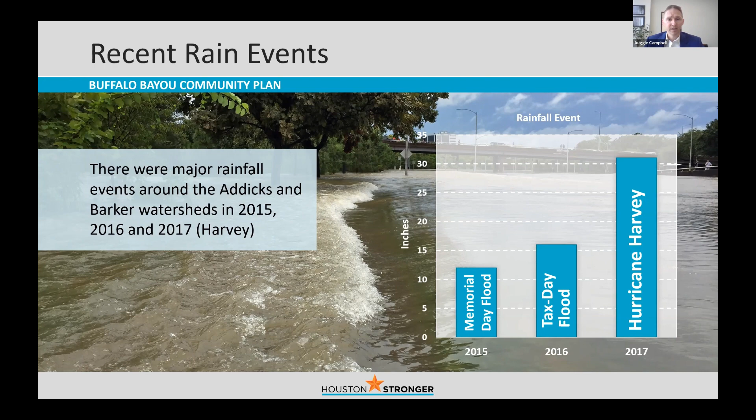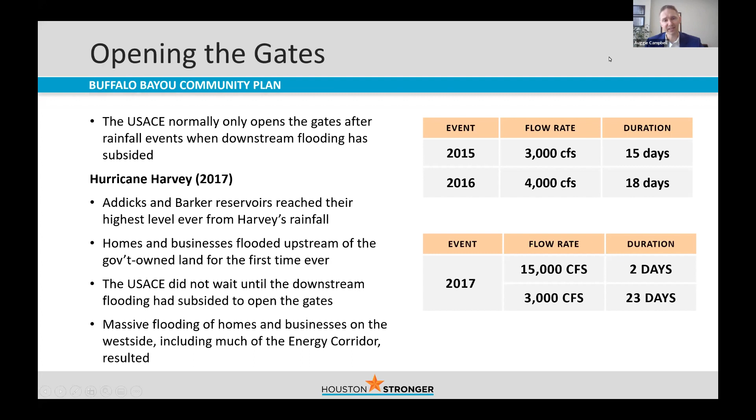If you go to the next slide, you can see just how insufficient the infrastructure that we had was, and how big of an issue flooding became. You can see the 2015 and 16 events, they were big events. They were 500-year storm events, and they were still nothing compared to Hurricane Harvey. If you go to the next slide.

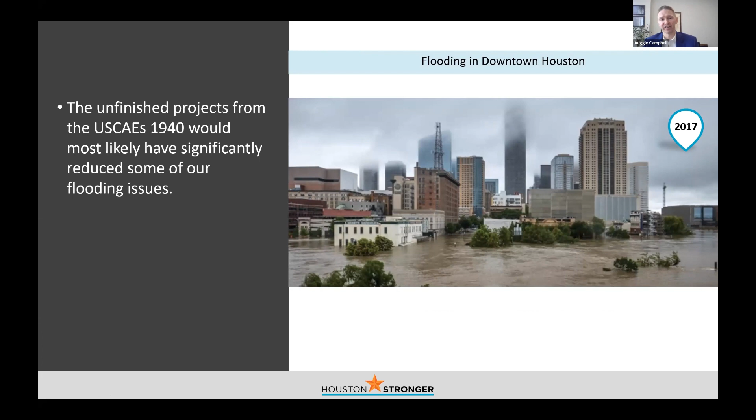Now, if we would have had that 1940 plan, what would flooding look like? That was the real challenge for Houston Stronger. We really believe that if we would have stuck to that 1940 plan and completed it, the significant flood inundation and loss of life and property damage that we suffered would have been significantly less. So if you go on to the next slide.

Again, this group really came together after Hurricane Harvey. And as Auggie just mentioned, the property tax revenues that the flood control district had been receiving were just really insufficient for a community of our size, and with the type of ongoing flooding problems that we experienced. And that's when we all said we need to do something more to keep a focus on this problem and to bring this constantly to the attention of our elected officials and other agencies that are involved with this, to keep moving forward with implementing a number of plans that have been created throughout the region and are just waiting for funding to get implemented.

And so that's what we decided to do. We needed to put a heavier emphasis on working through this tremendous backlog of projects that need to get done in order to help reduce the potential for flooding in this region. And we're very proud of the number of different types of organizations that are members and are willing to help us work on this issue.

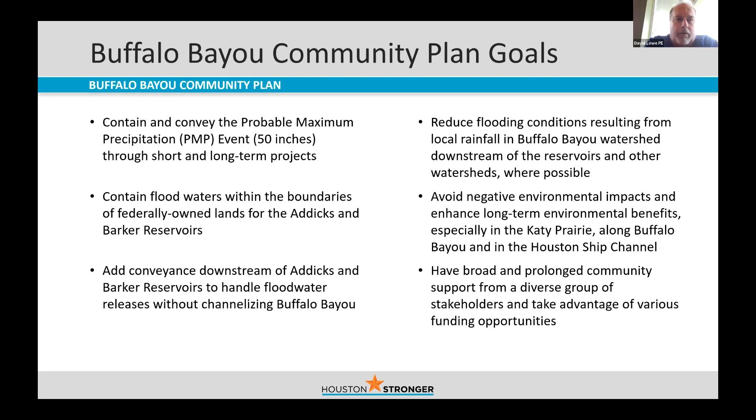The most important part of component 1 is the construction of a plus or minus 40-foot diameter flood tunnel that would be capable of conveying approximately 15,000 CFS of floodwaters from Addicks and Barker reservoirs down to Galveston Bay. In addition, there would be interceptors along this flood route that would help to attenuate floodwaters from not only a large storm, but also from smaller storms, and would actually help the flooding conditions downstream of the reservoirs in Buffalo Bayou as a result of local rainstorms.

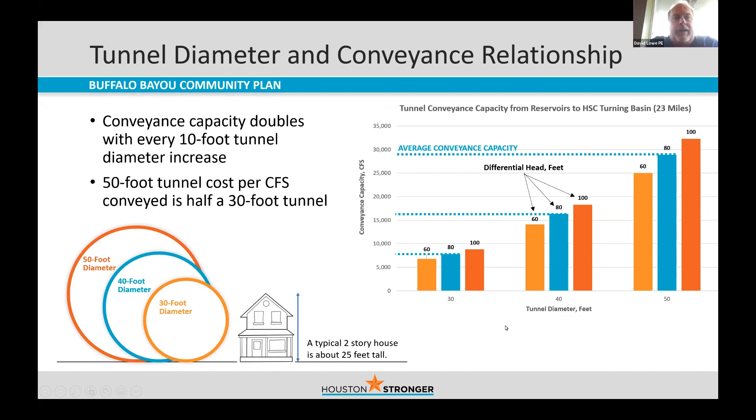Chris? The other thing I would like to mention before we move on from the tunnel concept is the issue of, is this even feasible? And there have been flood tunnels constructed in other cities throughout the Texas region. There's one that's under construction in Dallas right now. San Antonio has 2 storm tunnels.

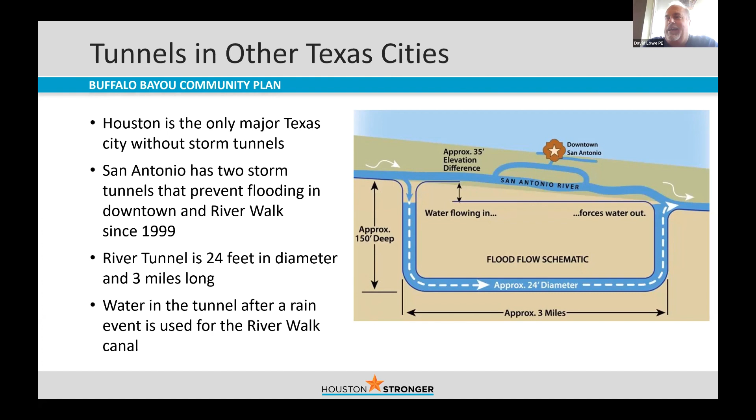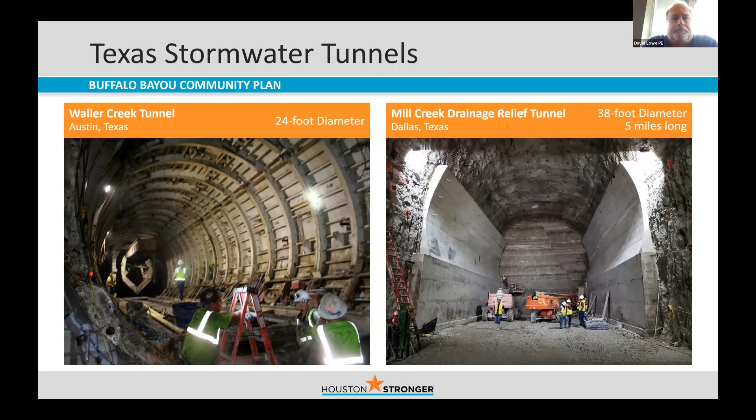And so it's always kind of interesting that the city, Houston, that has the most challenge with respect to flooding conditions is the last to address those flooding conditions via the use of flood tunnels. And again, here you've got pictorial representations of tunnels that are being built in other cities in the Texas region. Sorry, I went too far.

That's fine. The second component is the additional excavation of the reservoirs, both Addicks and Barker. And we are proposing that there needs to be upwards of an additional 76,000 acre feet of compensating floodplain storage in each of those reservoirs, for a total of 152,000 acre feet that would be constructed in both reservoirs.

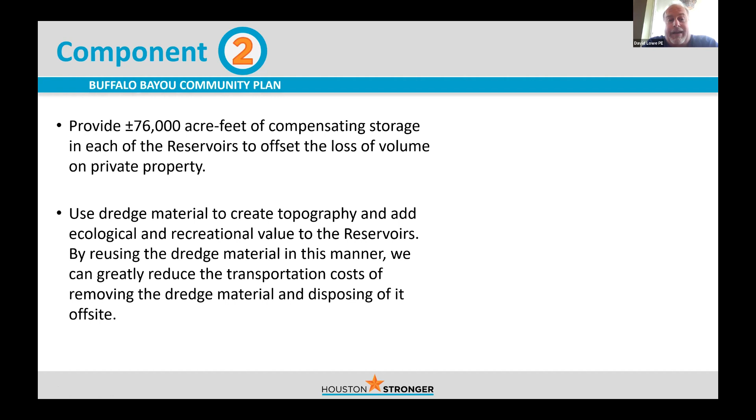Now, it raises the question of that's an enormous amount of dirt, and how do you deal with that dirt? And so we have come up with a plan to use that dredge material to create topography and to add ecological and recreational values to those reservoirs. And Chris, if you can go to the next slide.

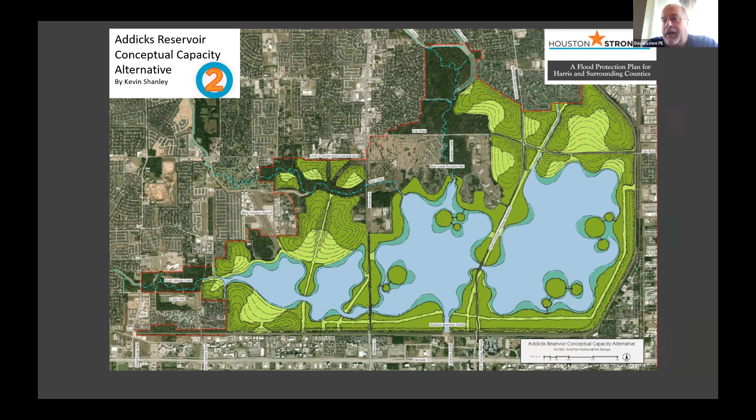We've actually produced a plan here that shows how we can over excavate part of that reservoir to create water features, and then to dispose of that excavated dirt by building hills and other topographical features within the reservoir. So we would not be faced with the monumental challenge of disposing of that material off-site and the cost that would come with this. So we developed a plan here for Addicks Reservoir, and Chris, if you'll turn to the next, we've also developed a similar plan for Barker Reservoir. And then we can go to the next slide.

Component 3 of our plan is to acquire land and to construct more storage in the Upper Addicks and Upper Cypress Creek watersheds along the existing creeks that exist there. We would need to create somewhere upwards of an additional 25 to 30,000 acre feet of storage within the Upper Addicks Reservoir. And we think that that can be done through creekside retention and additional shallow retention in that upper Addicks watershed. Go ahead, Chris. Okay.

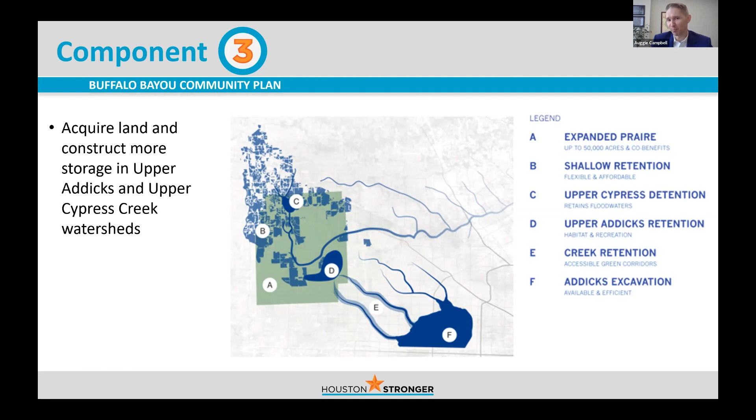And I will say that you'll notice that there's a little bit of a difference on this graphic. We've appropriated this work with a lot of collaboration from the Katy Prairie Conservancy. And while David and the folks at BGE have done the brunt of our work, we certainly have been very fortunate in being able to collaborate and take work like this picture here from Katy Prairie Conservancy and others too. So, but David, please continue.

Yeah, and then the fourth component of the plan is to expand the ability of the prairie and the Upper Cypress Creek Watershed through protection of those lands, through landowner agreements, and to create detention elements along Upper Cypress Creek to help attenuate floodwaters, because a lot of that water does make it down to the Addicks Reservoir. And so anything that we can attenuate in those floodwaters would help relieve pressure along Addicks Reservoir.

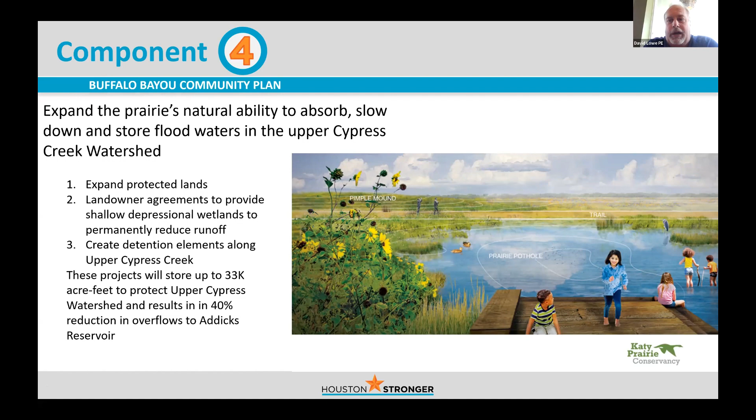The other point that I would like to make here is that by diverting water away from Buffalo Bayou and into the flood tunnel, we would help to attenuate the severe erosion and siltation issues that occur along Buffalo Bayou, and then eventually make it down into the Houston Ship Channel, where millions of dollars are spent every year on desiltation of that material that essentially makes it to the Houston Ship Channel from the erosion of Buffalo Bayou.

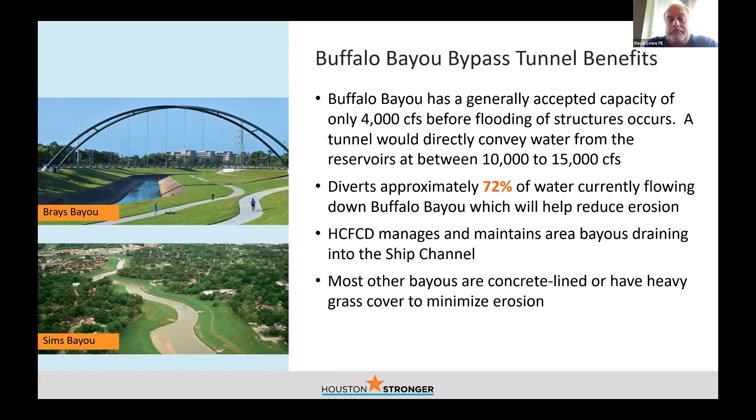And I think that this slide then talks a little bit more about the benefits of that tunnel with respect to its improvement along Buffalo Bayou. And again, I think this again is talking about those siltation benefits.

And I would like to add one more thing here, that the Corps study, which really called for the channelization of Buffalo Bayou, one of the things that really got Houston Stronger mobilized and looking at alternatives to this was that we really recognize that that is a non-starter. That solution was really a non-solution in our opinion, and would never be able to be implemented. The amount of community opposition that would result from a plan for the channelization of Buffalo Bayou has already been demonstrated.

It was demonstrated in the 1950s and 60s. It's still demonstrated on a daily basis by the groups that meet on a regular basis to protect Buffalo Bayou as a natural resource. And I would like to add that of all the water courses within the state of Texas, Buffalo Bayou very well may be one of the most protected. And so the idea that it is going to be channelized and turned into a concrete-lined trapezoidal channel, just good luck to anybody who wants to try that.

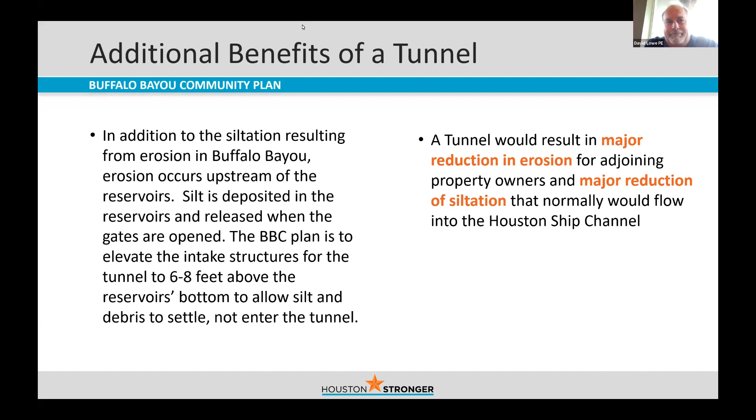Next, Chris. Okay. And Auggie, I think you probably wanted to jump in here and talk about, we recognize that there were other challenges with the tunnel, specifically with the outlet structure going into the Houston Ship Channel with respect to navigation, with respect to turbulence and erosion potential. All of those would be engineering issues that obviously would need to be addressed through the preliminary engineering and the design of those facilities. We're not really addressing those here. We're just recognizing that they are issues that need to be addressed and are calling for them to be addressed.

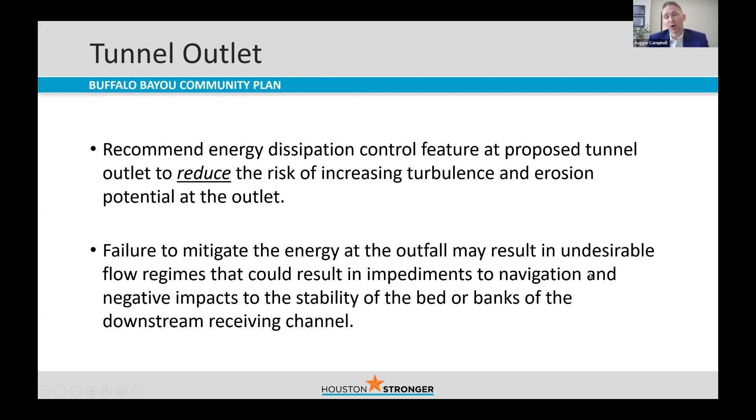Right, and those are engineering challenges that people should pay to solve, and I do appreciate all the volunteer time that David's put into this. But we have talked to the port industries, talk regularly with the flood control district and often with the Corps, about how the tunnel outlet can be, where it should be placed and how it can be constructed to really provide a benefit.

And there are challenges, and we recognize that communities have opinions, and we want to make sure that the process that these different entities use is set up to channel those opinions into their thinking to make sure that once we get to construction, we're able to move this project forward, that we won't face significant opposition because we've included stakeholders in the process. And that's one of the things that Houston Stronger has worked hard to do, reach out across communities to be very inclusive in our approach and

incomplete in our approach, and to a certain extent intentionally incomplete, because we understand that whether it's the flood control district, the Corps, the port, these entities have resources that they will want to use and should use to make sure that we have the best outcome, and that we should, as these entities use their resources, try to include stakeholders along the way, so we really do have an engineering solution that works for the community.

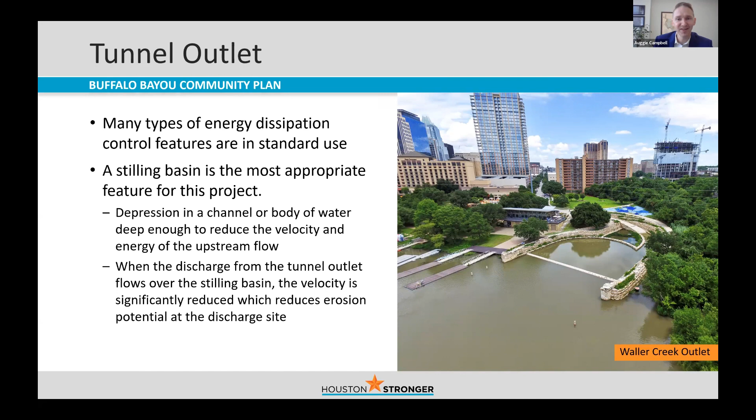And then, back to the whole nature of our work at Houston Stronger, and that is really to continue to look at how this map is incomplete. Like I said, we are intentionally incomplete. We know what we know, and we understand we don't know everything. And we have a lot of intelligent engineers on this call. And if you have projects or ideas that should be included, I'll point back to Kevin Shanley and his work that we've included in our project. That was certainly a great improvement.

BGE had done some really good initial estimates and preliminary engineering, and Kevin improved upon that. And that's been beneficial to our organization. And it's great for me just to be on a call with David and Kevin Shanley and Larry Dunbar, and to hear these really smart engineers.

And I'm a lawyer, so I think I told Ron, every JD comes with a complimentary PE, so I certainly think I know what they're talking about. But on the flip side of that, every PE comes with a complimentary JD. So when we get into legal issues, David and Kevin certainly have opinions, and it's fun for us to work through those. And it's fun just working on this project with David and Chris, and it's fun to be able to present it here today. And I'll flip it over to you, Chris.

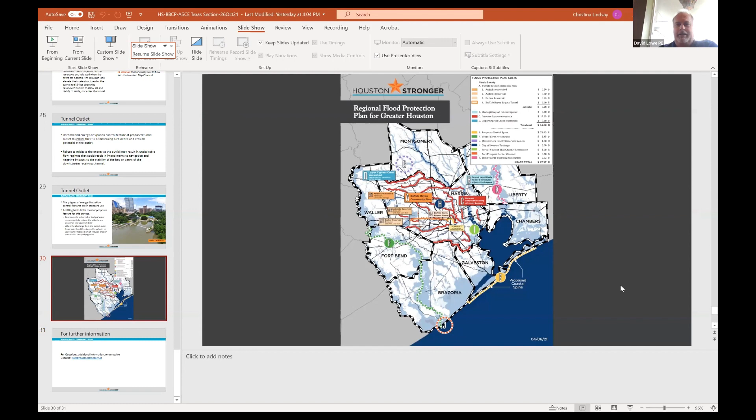There are a couple of other questions that popped up here. One of them being, are there any other watersheds in the HGAC region that have similar issues as Buffalo Bayou? And the answer is yes, there are, and we have put together a plan to address those regional issues. Chris, can you put our regional plan back on the screen there? I'll do that, sure. Let me see if I can go back. This one. That's it, yeah. A little hard to see at this scale, but I think we're sharing this presentation with everyone so you can see it. Thank you, Chris.

And this goes out into, I guess, a 8-county region, showing monies that need to be spent to address flooding issues. And I think what we're looking at here is a number upwards of 67 billion to address the region's flooding concerns. And I think, Chris, that number now has grown to a number in the neighborhood of 70 billion.

The other question that came up is why don't we just implement the 1940s plan? And the challenge there is obviously the Houston region has grown, and development has occurred in such a manner that there is not a corridor to implement that 1940s plan, which essentially called for the construction of the South Canal. I don't even know that there's enough money to buy up all the land that would be needed, right? Well, again, there has not been a corridor preserved. Yeah, there's not a preserved corridor.

And I guess this distance would actually be much longer than the distance that we've been proposing as well. But in concept, what we're trying to do is take these different pieces of this 1940s plan, which did not get implemented, and just say, well, look, there were some good ideas back then. And even now, as we go forward, let's not lose the opportunity to take these ideas and go forward with them.

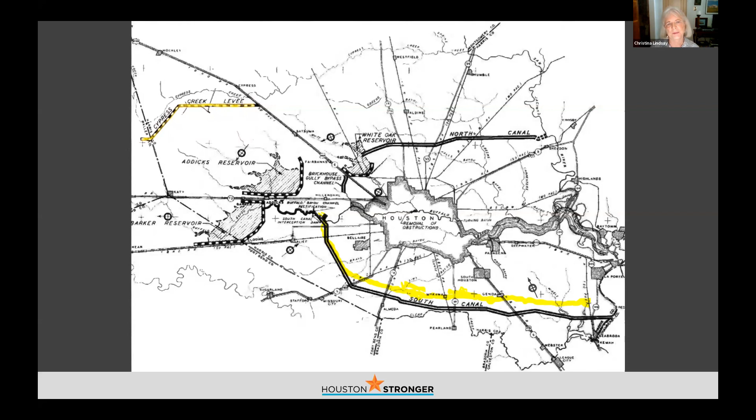People say, oh, that's too much money, we shouldn't do it. But look at the mess we're in. And if we had followed these plans earlier, what would things have looked like? And so we just have to not keep worrying about cost all the time, right? Because it costs even more in the long run when we don't follow through on these things. That's right. And recognize that the major component of the 1940s plan that was never put into place was the downstream conveyance from the reservoirs.

And that's really one of the primary focuses of what we need to get in place. Yeah, correct. And just damages from Hurricane Harvey alone, depending on the estimate that you're looking towards, are over $130 billion. And that's one storm. The San Antonio flood tunnel, they say, paid for itself in one storm event. So there's a really great return on investment story that goes along with this. And maybe once we come back, we can talk a little more about that someday.

One last question in there about, has future subsidence been taken into consideration? And I think the answer is only to an extent, and I think this is really talking about looking at what existed on the ground when David studied it. David, correct me if I'm wrong, we never asked David to say, all right, let's look at subsidence and the impact.

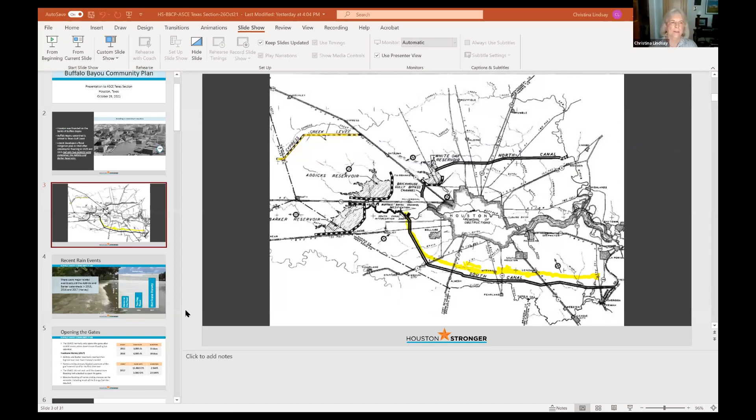Yeah, we did make some conservative assumptions, and probably the most helpful thing to talk from here would be the plan and profile drawing. Chris, if you can get that back up on the screen. Talking about the tunnel profile? Yeah, the tunnel profile. This one here. Yeah, that's it.

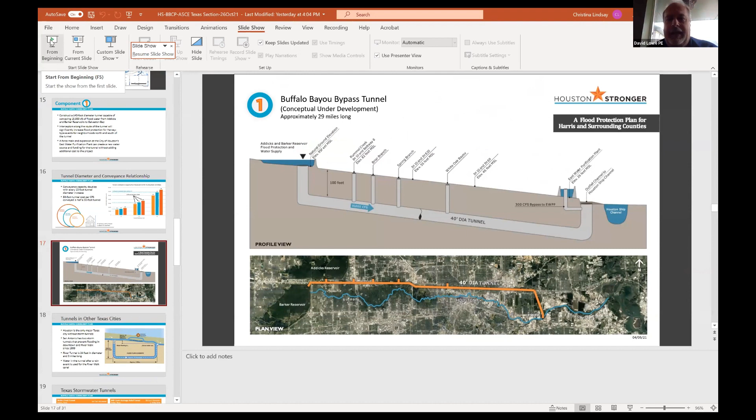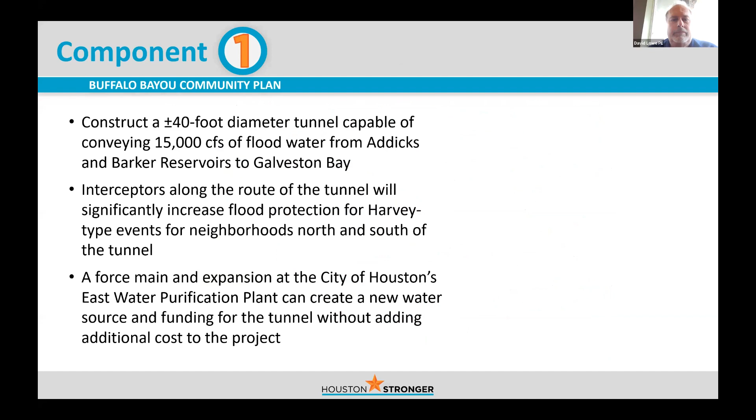One of the things that you'll notice from this is that this does not function as a gravity drain tunnel, that it actually functions as a very large siphon. Sorry about that, there we go. It's proposed to be approximately 100 feet deep. So the question is, since it's going to operate as a siphon, what kind of head conditions have we assumed?

And the assumptions we made here is that there would be no flow in the tunnel until we got approximately 6 feet of storage within the reservoirs, and for the downstream head condition, the assumption we made was the Ike storm plus, I think it was 3 feet. It was either 2 or 3. I think it was the Ike storm plus 3 feet. And with that, we were able to get 15,000 CFS down a 40-foot tunnel. So again, we've made what we believe to be some pretty conservative assumptions to try and hit that 15,000 CFS number.

With respect to the issue of subsidence over time, as Auggie had mentioned, there's been a lot of gains made in retarding subsidence. Not to say that it would be completely halted over time, but we've got a lot of conservatism built into this model, so that for at least the foreseeable future, I don't think that it would be a major factor in reducing the capacity of the tunnel.